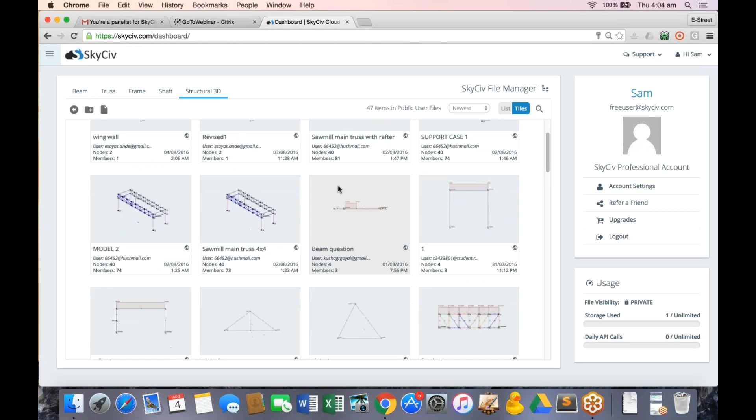So here we have a list of our software. You can toggle that in now. And here we have a list of all the files that we have through our file manager. We have a public user file, so you can actually see what other people are building. It's just an ongoing list of what users are creating. So you can see some really cool structures in there. Otherwise, we also have some structural samples just to get you started, looking at what's possible on the SkyCiv software.

And this is obviously all cloud-based, so all your files are managed here on our servers. You can send them to other SkyCiv users. It's a fully functional file manager, so you create folders, subfolders, copy, paste, rename, you name it. You can have a fully manageable file manager here.

At the top we've also got some support. We've got FAQ, documentation, contact us, and we really pride ourselves on our service. So we generally get back to you within a few hours and really try to help you with your modeling and analysis needs. So we're not just a software, we really want to give you the best service we possibly can. So we really are hands-on. You'll be speaking to an engineer or a developer, someone who's actually created the product, and they can give you really good customer service. We also have our account settings, upgrade page, and obviously log out.

So without any further ado, I'll take you through an example of the Beam software and also Structural 3D. So starting with the Beam, I'll just click this side tab, and this will take me to the Beam software. And we get a lot of feedback that it's a really easy user interface. So it's very intuitive. It won't take you too long to learn how to use the product. We find with SkyCiv Beam, training is watching a 10-minute video or a demonstration like this, and you're pretty much fully trained up in how to use the software.

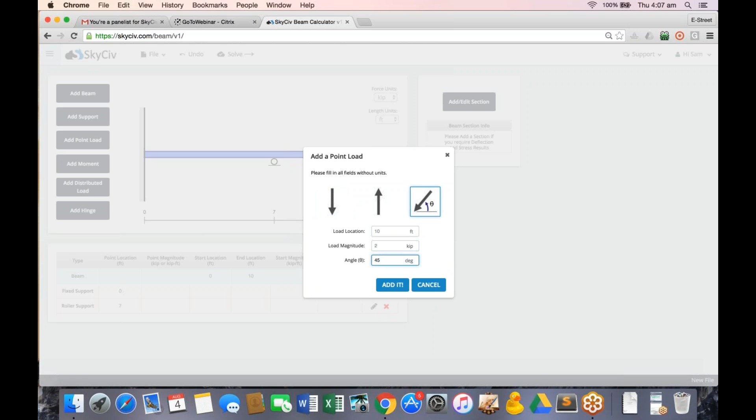So you just enter your position, the magnitude, and the angle at which you want to assign that load at. And distributed load, so I'll do maybe 2 to 8 feet and 2 to 5 kip feet in the downward. So I can go upward force or downward force. I'll just leave it as a downward force for now.

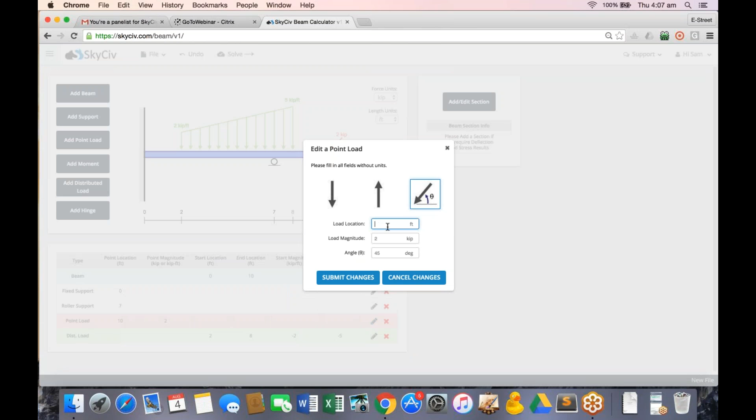We've also made it really easy to make changes, so maybe we want to change that location. I can just go down here to my table where I have all my inputs, and I can just change that point load, and maybe I'll move it across a little bit to 9 feet. So it just enables you to make changes really quickly, and especially when you're iterating between the results and the model setup, you can just hit that edit button there, and it makes it really easy for you.

You also see that the loads are all proportioned to the largest load, so we've got 5 kip feet, down to 2 kip feet, down to 2 kip, and it's all proportional, so you can really see where the main loads are occurring.

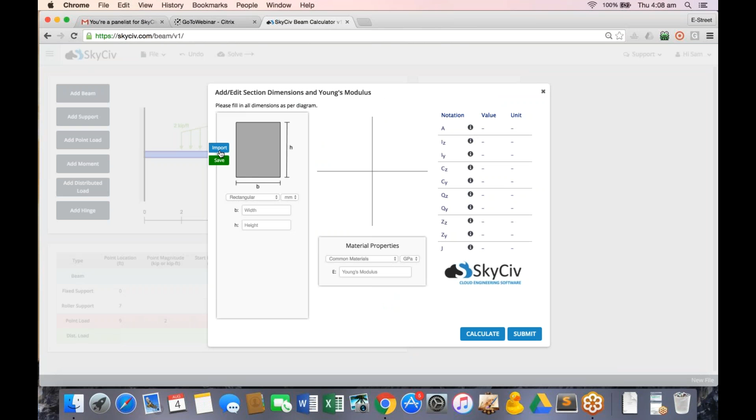The last thing to do is just assign a section property to that beam. So I'll just click this Add Edit Section, and here we have our section builder. This is constant throughout all of our software, so once you've learned it once, you know how to use it for SkyCiv Beam, for Structural 3D, and all the software that you have available to you. We do have a library of sections, so being in the American, we'll go through the American library. We have American, Australian, British, European, and you can also save and load your own sections. I'll show you how that can be done in just a minute.

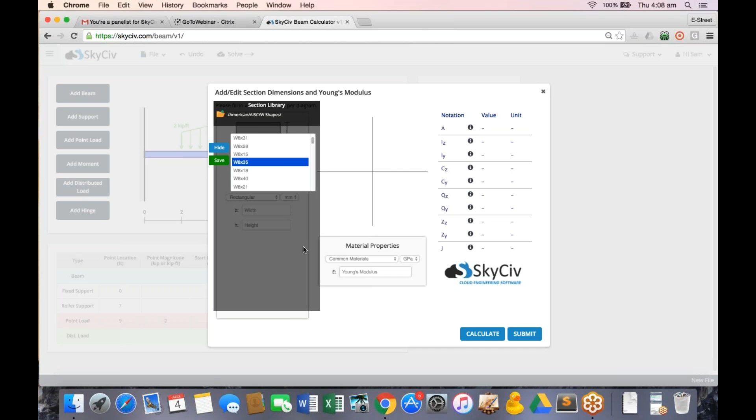So I'll just start by loading an American AISC W shape, which is sort of your traditional I-beam. When I double click that, I can see it's loaded. I can see my section properties here and also my material properties here. And I'll calculate and submit. And I can see it's updated there. So now I have my beam section information and that's ready to go.

So as you can see, I was talking and explaining, but I managed to build that structure within 30 seconds or a minute. So it really allows you to get started really quickly. You can run quick analysis, quick design checks, or preliminary designs, just in a matter of seconds, really.

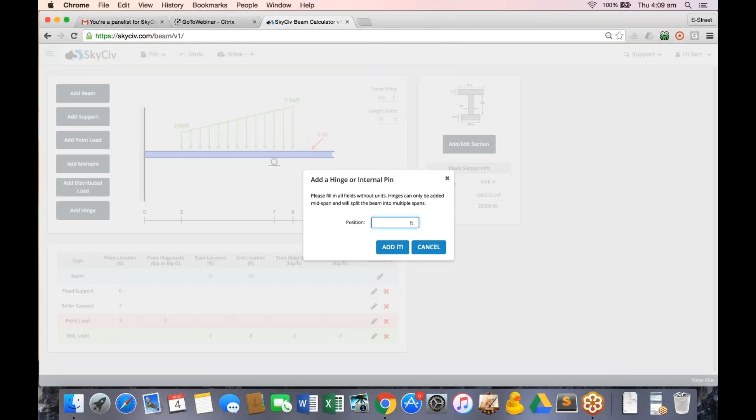And I might just add a hinge just to show. I'll add that on 3. So you can do hinge joints here, just more functionality for your designs. So once that's done, I'm happy with how my model's looking, and I'll just hit solve. And here we get taken to a very simple, very clean, concise report of the results that we have.

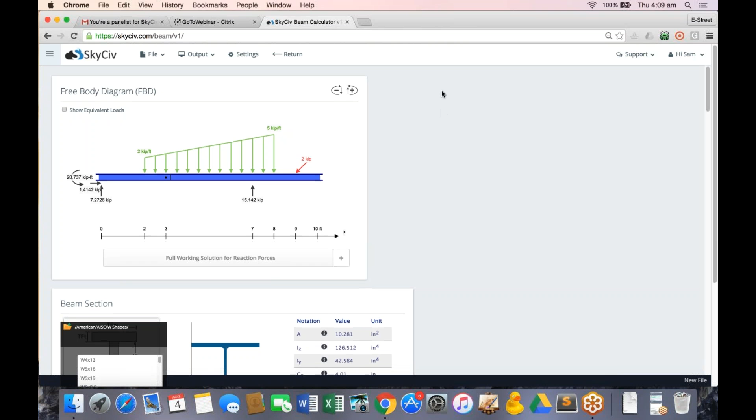So here we have our free body diagram. A great feature is you can turn on equivalent loads, so you can see where those equivalent loads are acting. Turn that on and off. I also have my reactions here. So I have my bending moment of 20.7 kip feet, my X and Y components of that fixed support, and also the roller support that I had here at this location.

Another thing we found we didn't like with traditional software is a lot of times this could get cluttered up and you can't really see some of the results. You'll notice that all of our labels, you can actually drag and drop them so you can really see what's going on there. So you never get that clutter where you can't really tell what's going on.

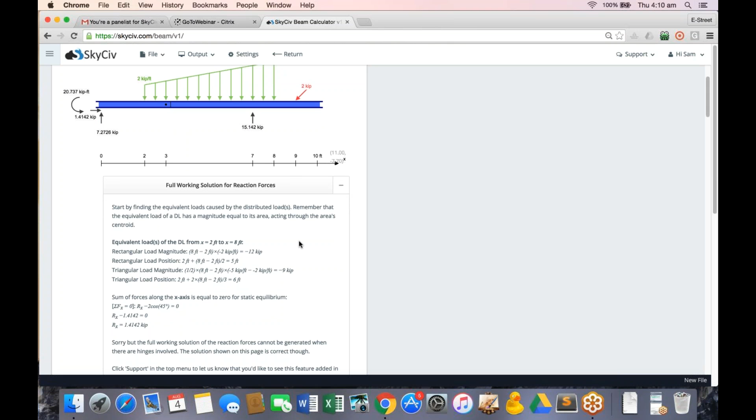We do have the full working solution of the reaction forces. So here it'll tell us exactly how we calculated those reactions. A lot of engineers need to actually hand calculate or verify their logic. This allows them to check their answers, check that their logic's correct and that their hand calculations are exactly right as well. And it's good for students as well for learning. It shows how we got to the solutions, and it works for determinate beams. So I'll just close that.

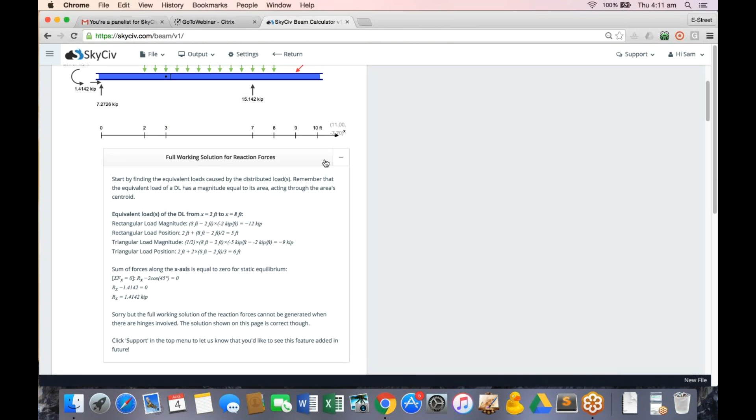Here we have our beam section results. So we have the same thing as the section builder. We've got all our results here, so you have a summary or a record of what you've built as your cross section, and your dimensions here on the left.

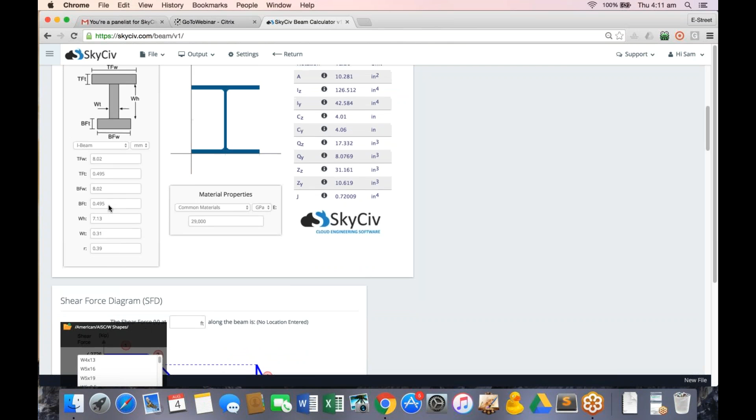Here we have our shear force diagram. So we have nice clean diagrams, and you can move these results, move these numbers, and if there's any overlapping, it's just a matter of moving them out.

You can also determine the shear force across any point. So say we need to know what it is at the midspan, I can put in 5 feet and it'll tell me the exact shear force at that location. So I can see it's minus 0.97 kip.

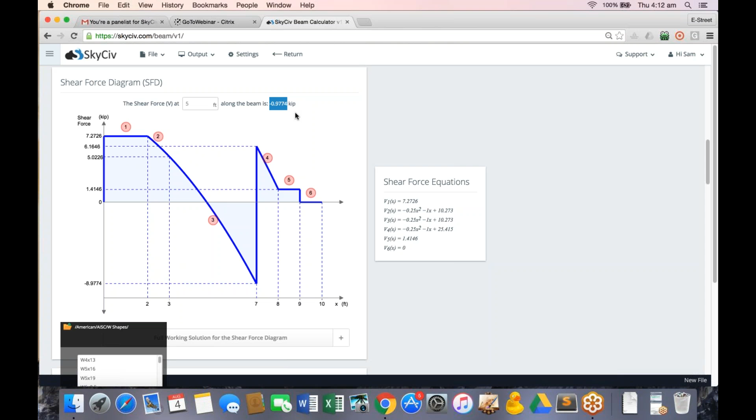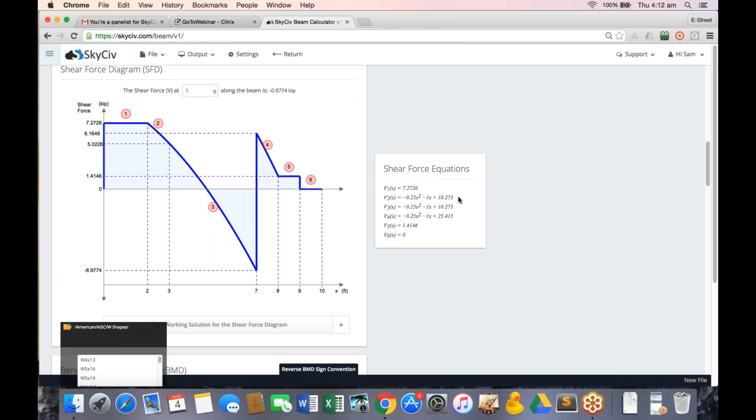We've also got the shear force equations here, so you can plug them into Excel or whatever other thing you need to calculate. We have all the shear force equations at any span across the member.

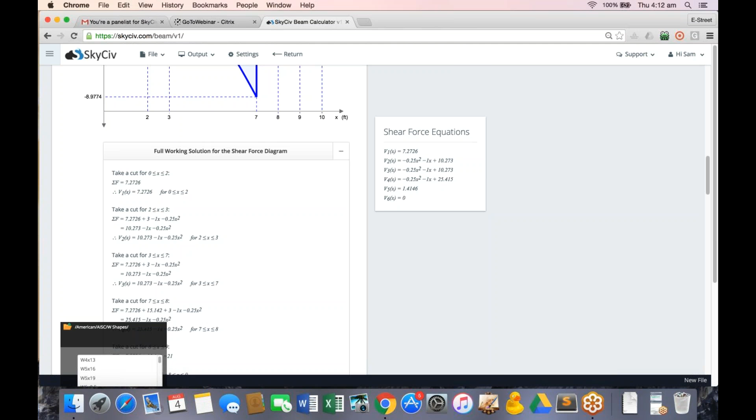We can turn on the full working solution here, so we can work out the cuts at each location. Whenever there's a change, like a load or a support, it will create a new equation, and this shows you how we came to those equations.

Same goes with the bending moment diagram. Obviously these take a lot of time to hand calculate, so in a matter of seconds you can get a nice clean diagram that you can include in your reporting.

Again, if I want to see what's going on at 2 feet, I can put it in and it'll tell me what's going on there.

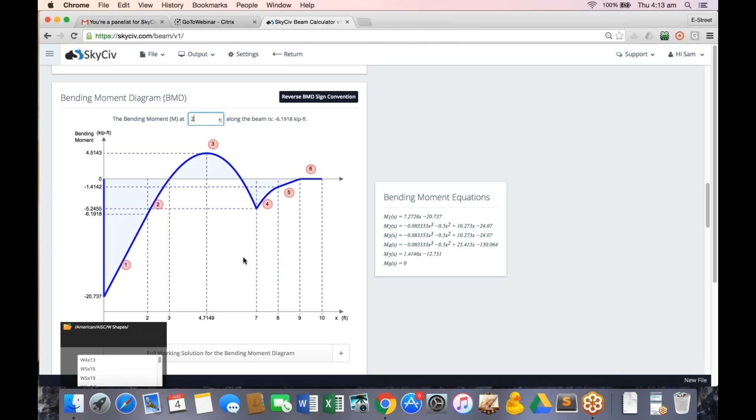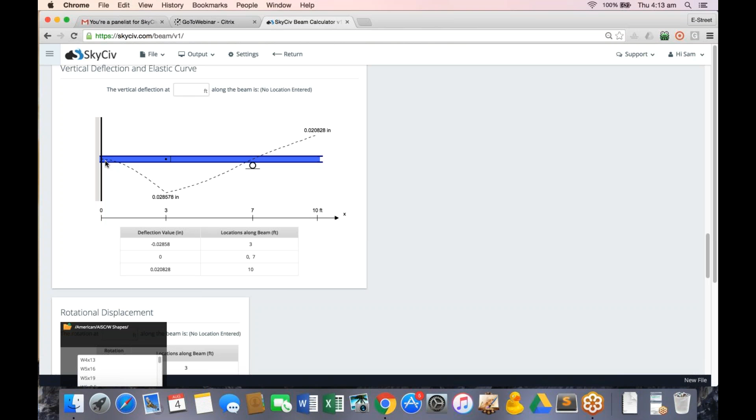Next would be the vertical deflection. So we can see there's a hinge joint, so there's a bit of a kink in the deflection curve, but it will tell us the max and mins of each span.

So I can see here we have a maximum of 0.02 inches, and we've also got it tabulated here, so you can easily identify where the maximum locations are and what the maximum deflection is.

Again, you might want to see what it is at the midspan, and we can see our results along the span of the beam.

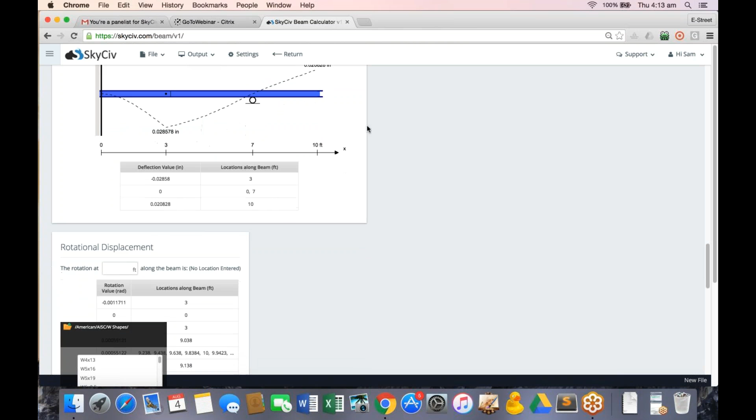Rotational displacement works in the same way, it's just in tabulated form, so we can see what the max and min rotations are.

And finally, we do have a really cool 3D renderer. This enables you to really see it in 3D life. You can make sure that your structure's been built correctly, that the dimensions you've entered all make sense. You might see it's too slender, but this enables you to really visualize how the structure looks in 3D space.

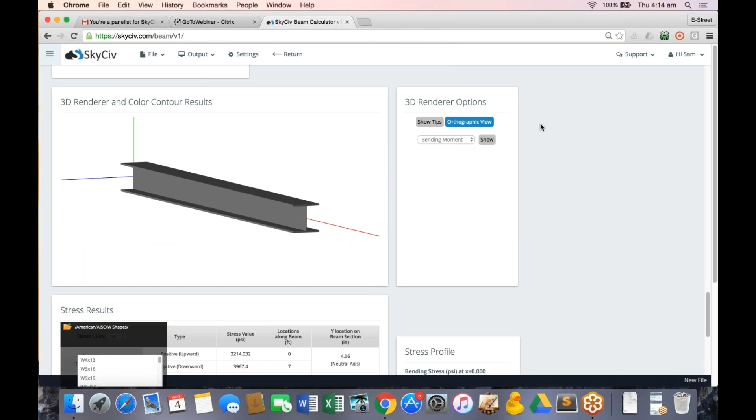A really great feature is you can actually turn on the specific results of what you're looking at. So say this is bending moment, I've also got shear force, I've got deflection. I can select from this menu all my results and it'll show it in real life on the 3D renderer.

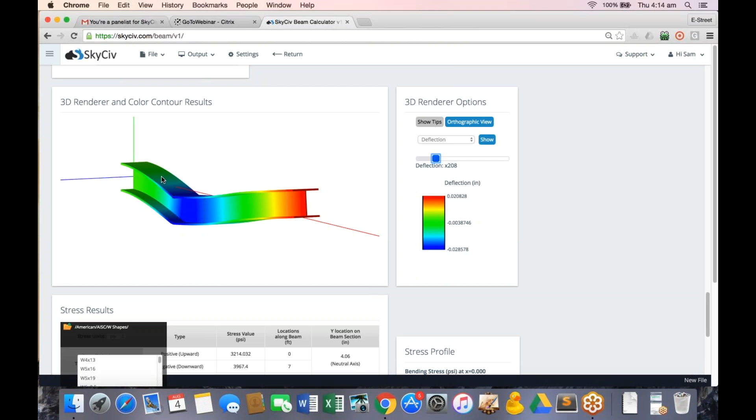So I'll put that as deflection, and I'll also show that you can actually deflect the structure. So I can see now my hinge joint has quite an excessive change there in deflection. I can really visualize and put that into perspective and include it in my reporting.

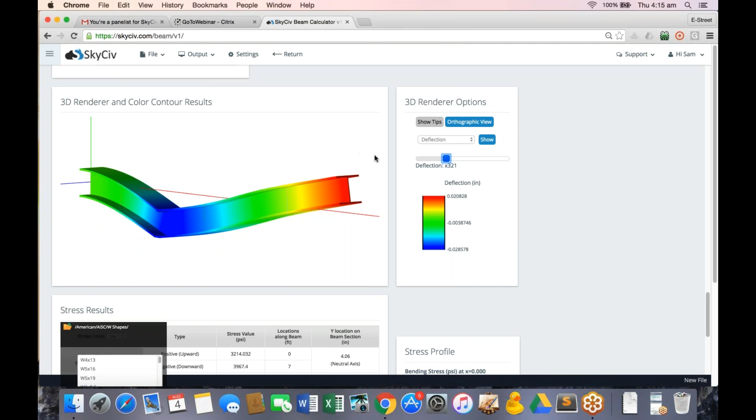So anyone who looks at it can now see we have a maximum deflection here in the blue of minus 0.028 inches, and that's where it's occurring, and I can see it's at the hinge joint. It really puts a more real-life perspective on the structure rather than just looking at a simple diagram. I'll leave it like that, so when I include it in my report, that's how it's going to show.

And finally, we have a stress result profile. This gives us our max and mins of our shear stress and bending stress. So I can see immediately where my maximum stresses are occurring, at 7 feet along, where there was a support. I can see that my max shear stress is there, almost 4,000 psi.

So for toggling between analysis and results, I can just scroll down to this stress result table, and immediately identify where my stress concentrations are, and where I need to really focus my design on.

I can even look at points along the beam, and it's going to tell me what the stresses are at that location. So I can use this in complement, and go down to bending stress, and have a look at these key areas I need to look at, and it'll show me a stress profile of what the stresses are doing across that cross-section.

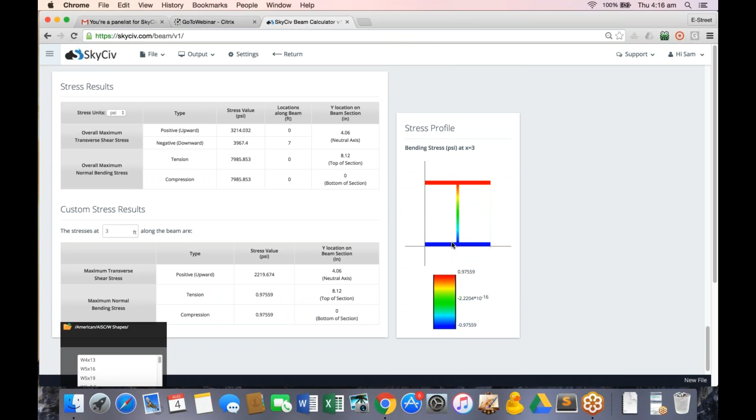And just to show you how quick, so that's the whole report there, and just to show you how quick you can iterate, and I'll just hit return, and maybe I'll change my cross-section. So I might make this top flange a little thicker, so I'll just put that up to, say, 0.8.

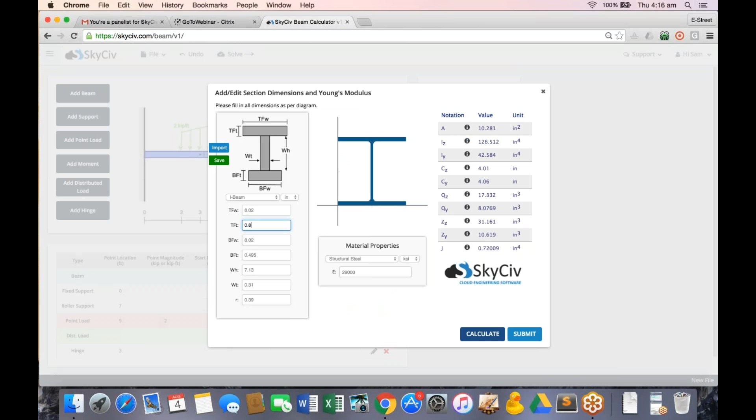Calculate, submit, so I can see it's gone thicker. Solve again, and my results are ready to go. I can scroll straight down to my stress profile and say, okay, that's gone down a little bit.

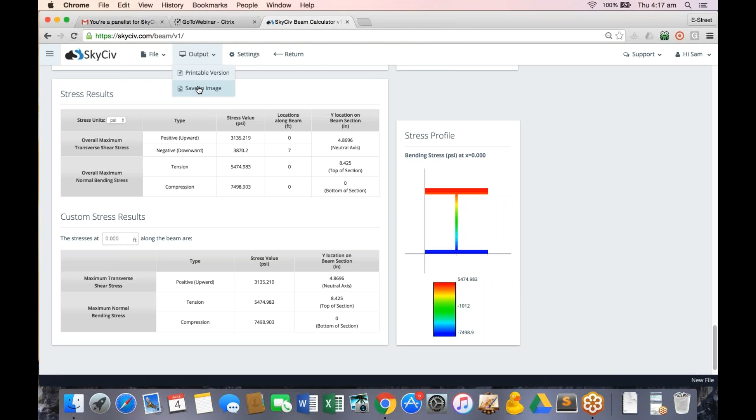I'm happy with that design. Let's export this report for the engineer or for the colleague or whoever it is that you'll be sending this report to. So from there I can save to image. We also have a save to PDF function that will be released in our latest update, but I'll just show you the save to image one. And this will just create a nice clean document for you to print or include in your reporting, and you can download that at any time.

So another thing you might want to do is just save and load your structure. I'll save this for later use. And that's now stored in my file on the cloud. So if I jump on another computer or if I want to show a colleague and I'm at their office, I can just simply jump onto Chrome, log in, and load my beam from just there. So it's nice and easy and it's all accessible.

So I think that's pretty much it for SkyCiv Beam. If there's any questions, I'm happy to address them now. But if not, I'll continue through to Structural 3D and we can answer all the questions at the end.

Can you save locally to your own computer? That's the question. Not at this stage because the SkyCiv Beam file isn't compatible with any other software. It's just a 1D structure. But for Structural 3D you can.

Okay, because the follow-up to this question is often in the field I don't have Wi-Fi access, so how do I address this problem? Yeah, sure. Okay, so you can use your hotspot. So I've used my mobile hotspot at times. You just turn that on and it'll give your computer Wi-Fi access. Yeah, that's usually how most people would use this remotely out in the field. Or it works on iPads, so if you have an iPad with internet connection, that's what a lot of people use as well. Okay, thank you, Sam.

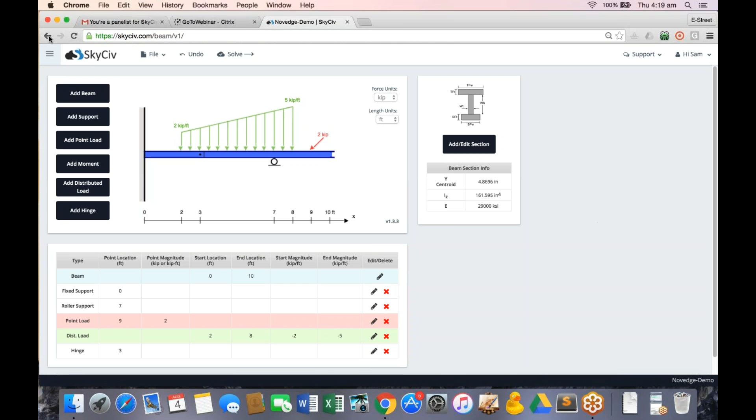Okay, so I'll just go through to my Structural 3D program. So we actually have a truss and frame program, but they're identical to Structural 3D, just with some limitations. So I'll just take you straight through to Structural 3D.

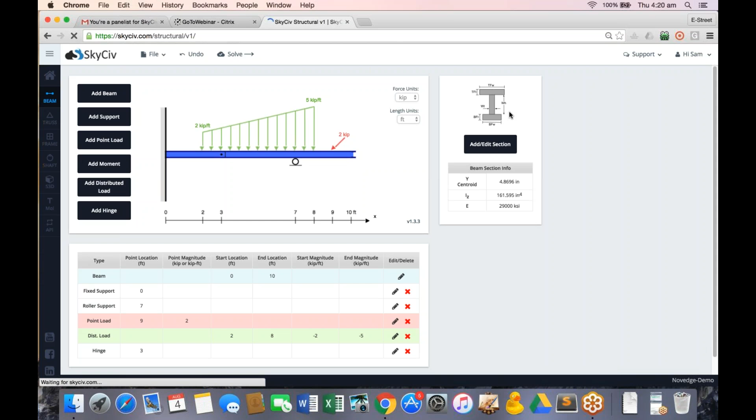Just make sure my internet connection is okay. Can you still hear me, Barbara? Yes, I can still hear you. We're just waiting for the connection. Okay, I was just worried my internet dropped out. There you go. Here we go.

So here's our interface of the Structural 3D program. So as I mentioned before, what we really like to promote is just it's simple, it's easy to use, it's clear, it's intuitive, so you can really get started immediately without any training whatsoever. So people will sign up for our accounts and jump straight in with virtually no training. If you do need training, it's just a matter of watching this 30-minute video or hour video. But it really is, the way we've designed it is to make it really intuitive and easy to use.

So on our left here we have our model building features, so adding nodes, members, etc. At the top we have our toolbar. So you can start a new file, you can open existing file, save load, and import and export. So with that question, we can export as a DXF file, so you can save that locally. You can send that to architects. It's interchangeable with other software, so you can really import and export your structures.

Under edit we have undo and redo. Job cleanup, I'll go through that a little bit later. Data sheet we'll also go through later. Output, and I'll just show you the settings just now. So here we have all our settings. I will change that to Imperial again, so it's just catering to you guys what you normally use. And we also have some visibility settings, some view settings, like you can turn on perspective or orthographic view, and some solver settings, so you can really be specific about how accurate you want your results to be.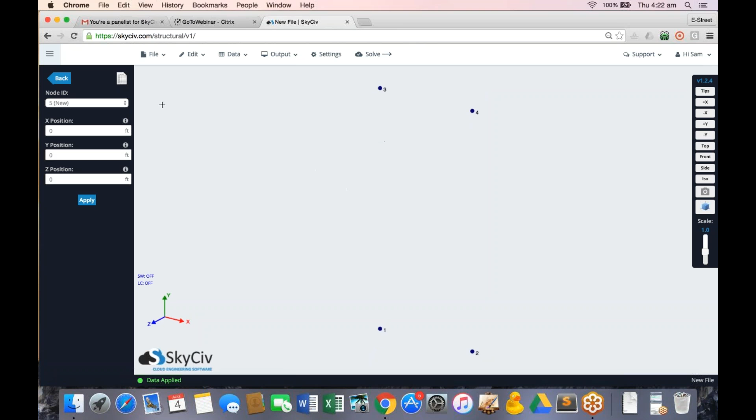Now another great feature is I can actually add in, through my data sheet, I can copy and paste these nodes, so I can do things much quicker. I'll just go ahead and copy that and paste it and add some Z component to it. And now when I apply that, it's just added that in.

It works much like an Excel spreadsheet, so if I enter a 4 there and I want to make a mass change, I can just drag and drop that and hit apply. So if you're working on a really big structure, this enables you to make mass changes in a matter of seconds. So that's all my nodes there.

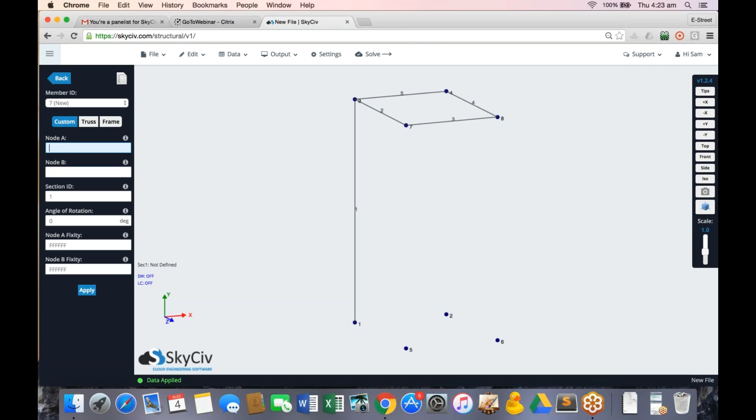Again, going with ease of use, we can now join these up as being members just by dragging and dropping. You can really mock up a design quickly just by dragging between your nodes. Alternatively, you can go through our side menu, hit members, and just join them up: 8 to 6, 7 to 5, and 4 to 2.

So it's just as quick. I can just toggle through and mock up our design.

Here on our members section, you can assign section IDs, which I'll show you now. Say for this top part, there might be a different section. I'll select the member I want to change, and change that to being 2. So I can really click and toggle on, assign different section properties really quickly just by clicking the member and changing the properties.

I can also angle it, or change the node fixity. So I might want to put a hinge joint at 8 there, or maybe at 3. If I go to 5, I'll change the fixity to a hinge joint there, and also change the section properties to 2, and hit apply.

And we put a little tab there, just a little line, to show you that that's not a fixed support, that there is a hinge joint there.

So I'll go back, and now I'll assign some section properties. We've added these members. There are 2 different types of sections. I can see here section 1 is not defined and section 2 is not defined. I can click here and it'll open that menu, or I can just hit the sections button, and I can start assigning my materials, my members, and my sections.

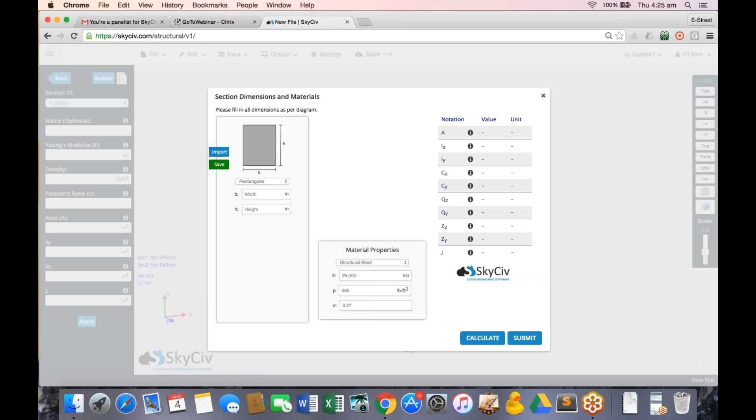So I'll just enter our section builder, and again I'll just import some sections from our section library.

Sam, I have a question. Sam, I'm sorry to interrupt. Sure. Barbara is asking, can you please open up the spreadsheet view for the members too?

Yeah, sure. Thank you. So there we have our mass changes as well. So if you want to say assign, maybe we want to change this to 3, we can just simply click that and drag. So there is a data section for all of our functions here. It's asking me if I'll discard any changes I made.

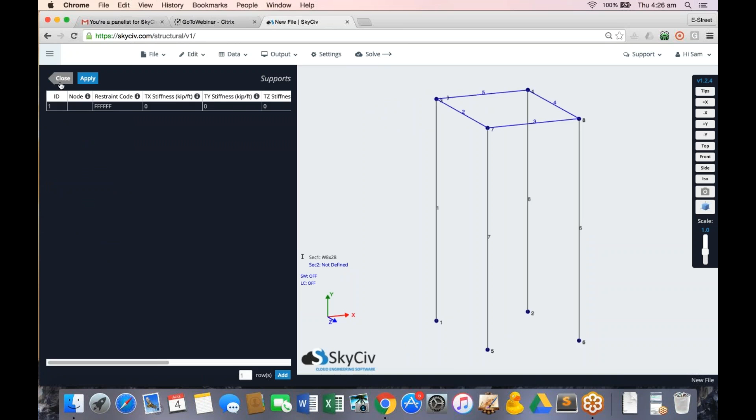So for supports, there's a data sheet. For everything, there's a data sheet. Point loads—so if that's what you prefer working with, they're all available there.

Okay, so I'll continue through. After I set my first section, I can see that's updated, so I can see a little I-beam, and I can immediately identify what that grey or that black section represents.

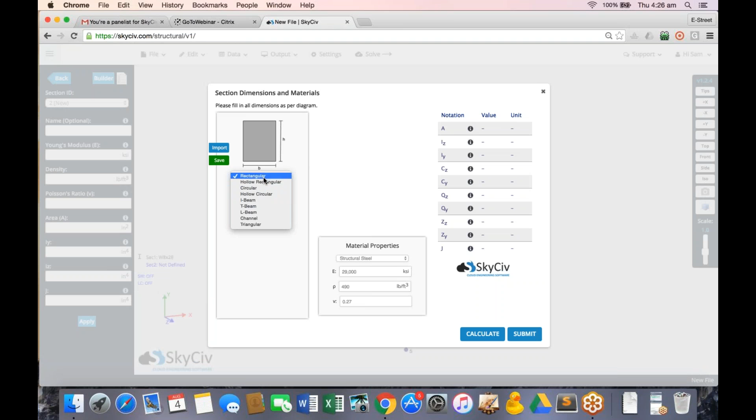I'll just add a second section for the top, and this one I'll actually just do manually, so I'll add a rectangular section. Maybe make it a bit bigger, so I can make my custom section and add that, and as you see, it's recognizing it there again.

So now my sections are assigned. I'll just add my supports here at the base.

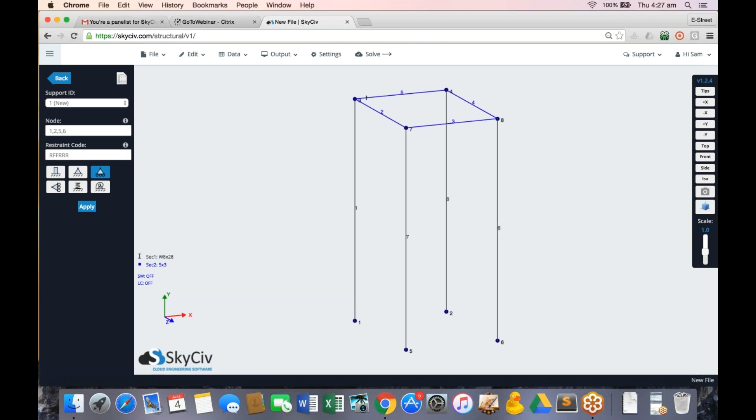A really great quick feature is you can just comma separate these, so I can go 1, 2, 5, and 6, and assign my restraint code as being fixed. I can select any of these options or put in a custom code, but for my purposes I'll leave them as fixed and hit apply. So in a matter of seconds I've assigned my boundary conditions to my structure, and I can see my base is being restrained with fixed supports.

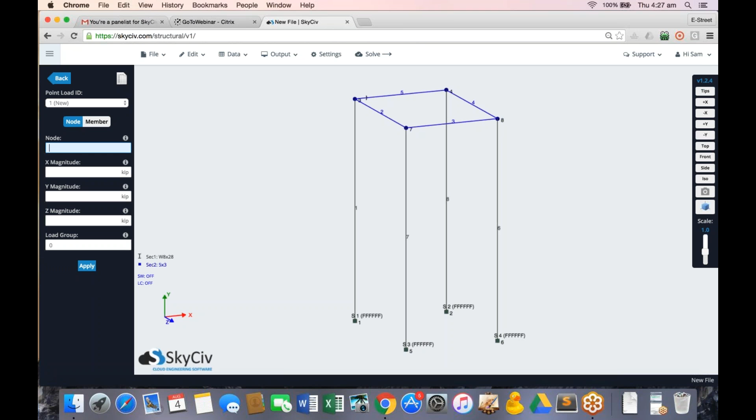So now we just have to apply some loads. I'll start by applying a point load. Point loads can be made at nodes, midspan, or any point along a member. So I'll add one at node 4. I can see node 4 there on my diagram.

I'll just do something like that, something in the X and something in the Y, and there I can see it's showing my force there in the X and Y component.

I'll also assign a distributed load, maybe across this member 3. So I'll assign member 3, and it's asking me for my start and end magnitudes. I'll do a distributed load, 2 to -5, and I'll offset this from the start and end position, so 20% from the start of this node and 20% from the end of this node.

I can also assign load groups, so if I want to do load combinations, maybe this is a live load and this one's a dead load. I'll assign load group 1 there, so it's a different load group. I'm assigning this UDL, this distributed load, as having a different load group to the first type.

So I hit apply, and I think I've made a mistake in what I was entering. Yeah, sorry, so -2 in the Y and -5 ending in the Y.

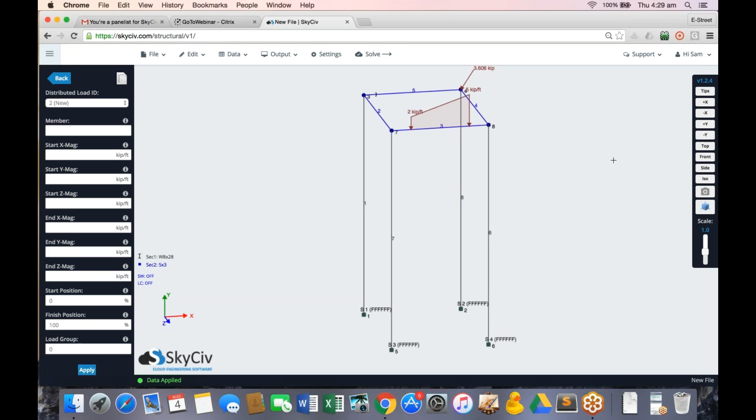So now I can see again everything is proportionate, so I can see 2 to 5, confirming I've entered that correctly. I can even scale these loads by holding S and scrolling, which lets me easily scale them just to make them more visible or make more sense of it.

And that's pretty much it. I'll assign a self-weight to the structure just to show you how easily that can be done, so gravity in the Y. And I'll show you a bit about the load combinations.

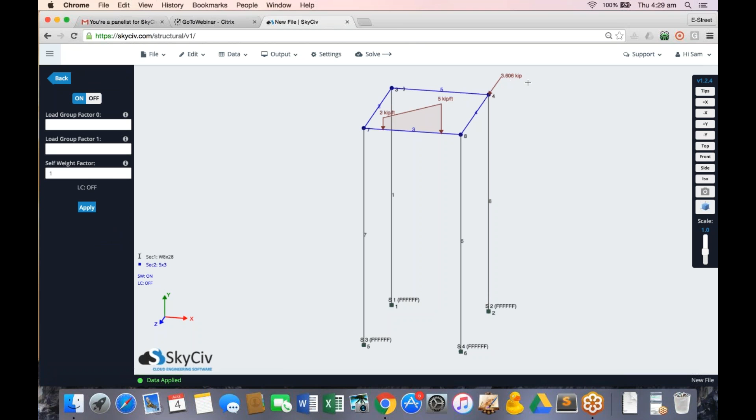So if I want to turn on the load combinations, I can see group 0 is this one, so maybe I want to apply a factor of 1.2, and for this one here maybe a factor of 1.5 to this distributed load. I can apply that, and I can see it's updated in my console there. My self-weight is now turned on, and my load combination is the equation that I'll be using.

I'll just show you how quickly it is to edit. My structure is completely built, I'm happy with my model, and I'll be ready to solve, but I just might want to make a few changes. As I mentioned before, you can click anything, so I can click my loads and change those there.

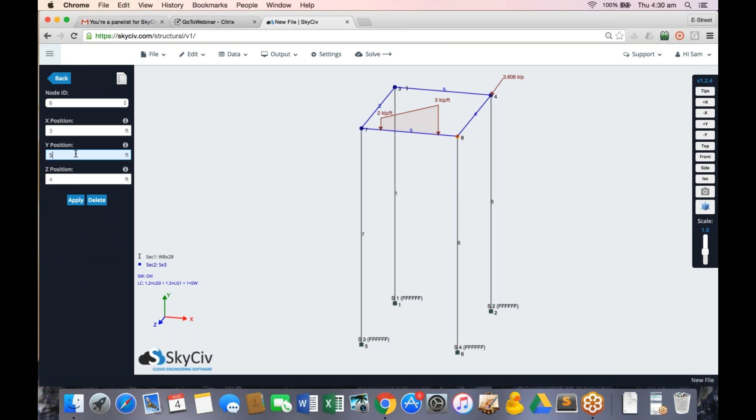Maybe I want to drop this load node a little bit, the Y component, so I'll drop that to 5, and you can see that's immediate. Those changes are made immediately, and now I have the adjusted structure that I wanted, just by clicking and making the changes through our left menu here.

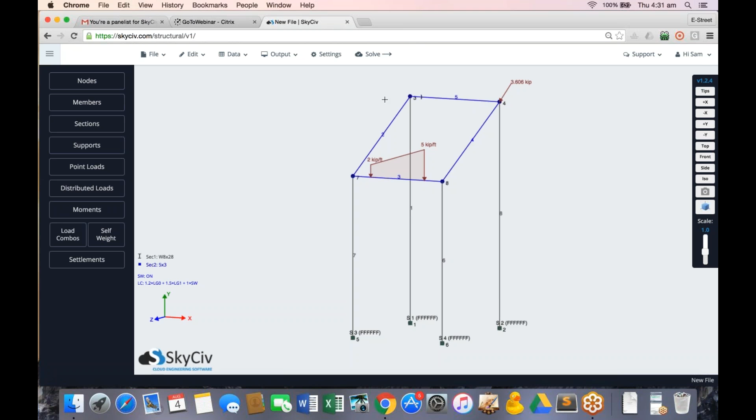But that structure is completely ready, and I'm happy with how I've built that. Again, I was talking my way through it, but something like this would typically take me 2 minutes to generate. So really, really good if you want to do a rough calculation or a preliminary design, or you just want to build things quickly and analyze them really, really quickly. We designed this software in that way, so you can build it really quickly.

But without any further ado, I'll go ahead and solve the structure. We have 3 analyses available: linear static, linear static and buckling, and P-delta. I will do a linear static and buckling analysis.

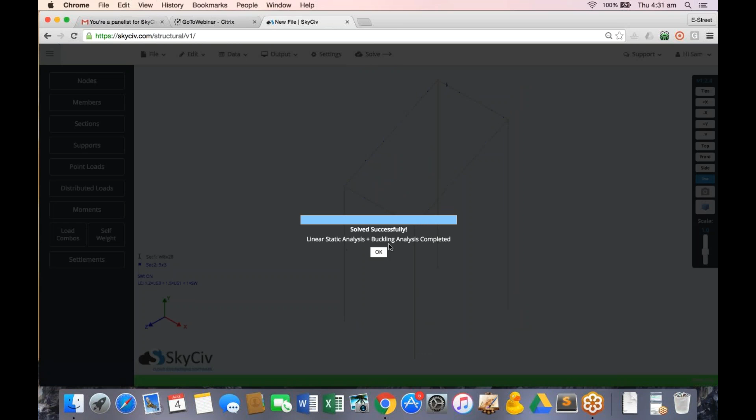And so this will get sent off to our server. Our server will do all the computation, so it doesn't put any strain on your computer at all. And you can see our structure is ready to view the results. So the buttons here on the left obviously have changed to account for the results that we have, and the structure is grayed out just to make everything a little bit clearer.

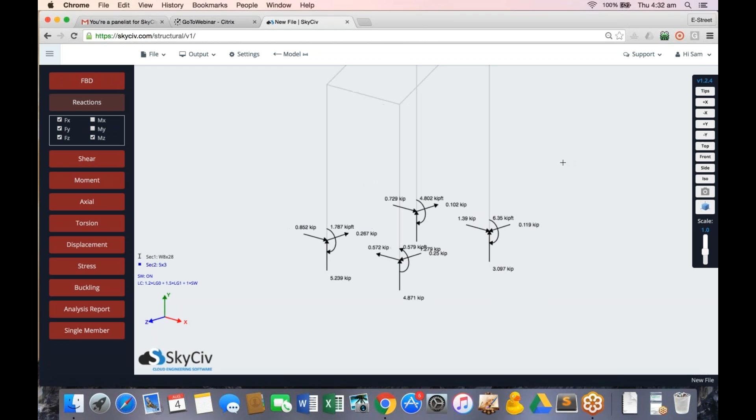So I'll start with reactions. So here we have our reactions. Obviously all our supports are at the base, and you can toggle on the different results that you want to look at. Maybe I just want to focus on the moments, because what we found with a lot of other software is this would be very cluttered and you wouldn't be able to really see your results. This diagram's not too bad, but in more complicated structures it can be.

So being able to toggle on different results just enables you to really zone in and look at the specific results that you're interested in. So that's reactions. Shear force diagrams. So we can see it's a clear way to view the shear force diagrams. We can scale these, so we can scale up or down based on what we want to look at. And again, we didn't like traditional software because it had this cluttering of results here.

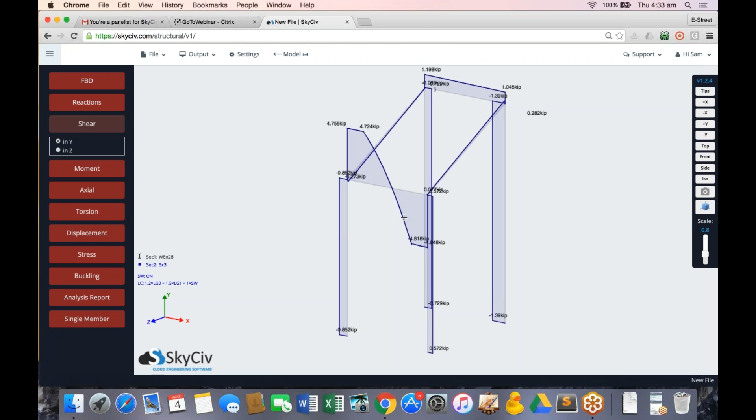So what we've done is we've added a few extra features, one of which being you can actually select a single member and you can really isolate that member, so you're not confused with the diagrams of all the other areas. This just allows you to select that one member and view those results. Another feature we've added, so I can turn that on and off, is again being able to click and drag these results, so I can move these around and really see what's going on in case there's any clutter of information. And what I might do here is I'll just actually save my structure.

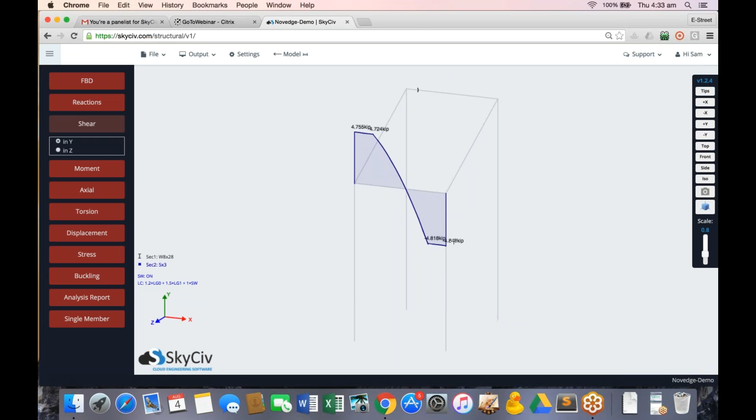And the reason I'm doing this is I'm going to make screenshots along the way, and they'll get saved with my file. So say this member is a really crucial part of the design. What I might do is basically, oops, sorry, let's put that. And that's a part of my design that I want to include in my report. I'll actually screenshot that and say shear force diagram member.

So I'll screenshot it, it'll save it locally on my computer, but it'll also store it with my file on the cloud. So now I'll have a screenshot available in my camera roll, and I'll be able to include that in my reporting. So it's actually asking me, do you want to open your camera roll here? So here I can see my camera roll of all my screenshots that I've taken throughout the demonstration, plus the thumbnail of my structure, just how it looks. And at any point, I can download these, I can delete them, however I please. So I'll just close that for now and continue with the demonstration, but you'll see how that comes in handy a little bit later.

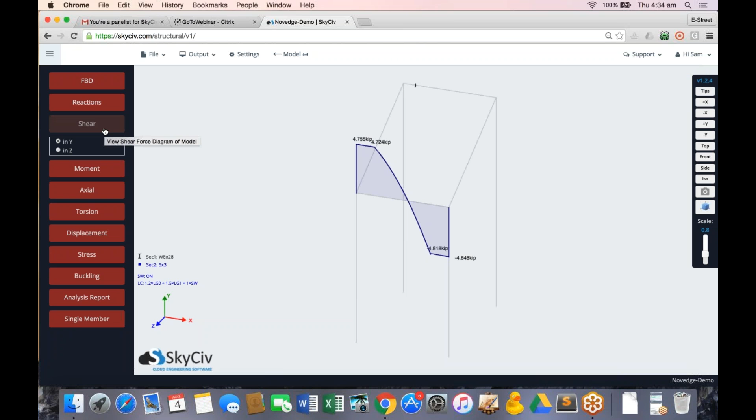I can also look at shear in the Z, or sort of toggle between Z and Y. So you'll see whenever you open up a result, you'll have these options available to what plane you want to focus on. Onto moments, so here we have our bending moments. Again, we can turn these on, or we can control and drag and turn on a few results, just if you want to look at those ones. But it works much in the same way that shear force did.

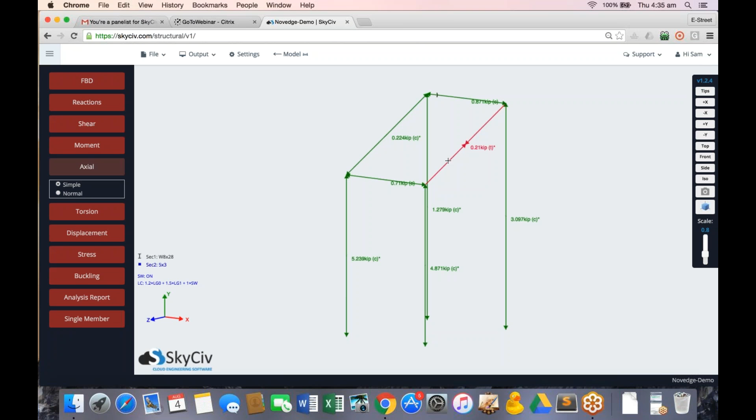Axial diagrams, we've actually done a little bit differently, just to make everything a little bit clearer. So I can see exactly what's going on, just at a glimpse. I can look at it, I can see what's going on. So I can see most of my members are actually in compression, and I just have one tensile member here at 0.21 kip. Again, we've done this just to make everything a bit clearer and easily identifiable.

I can turn on the normal diagrams if I want to look at the traditional way, or if there are some changes in the axial. Sometimes axial forces aren't exactly the same throughout a whole member. This will allow you to visualize that.

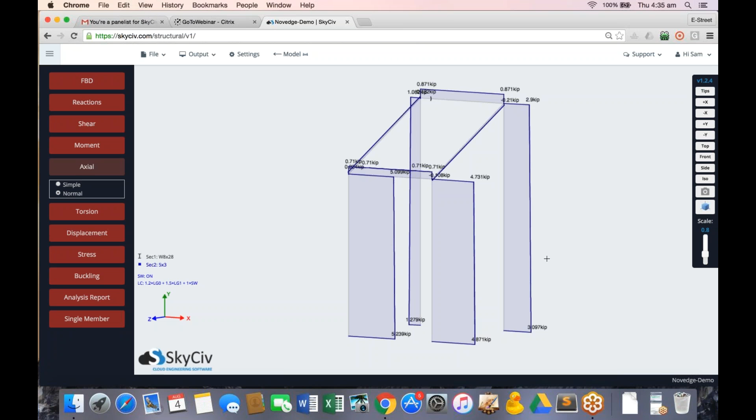Displacement of our structure. So here we have the deflected result, and you can scale in and out. So you can do this by using this, or by holding S and scrolling, and I can see how my structure is deflecting. Say I just want to focus on the sum, I can just turn that on through the side menu.

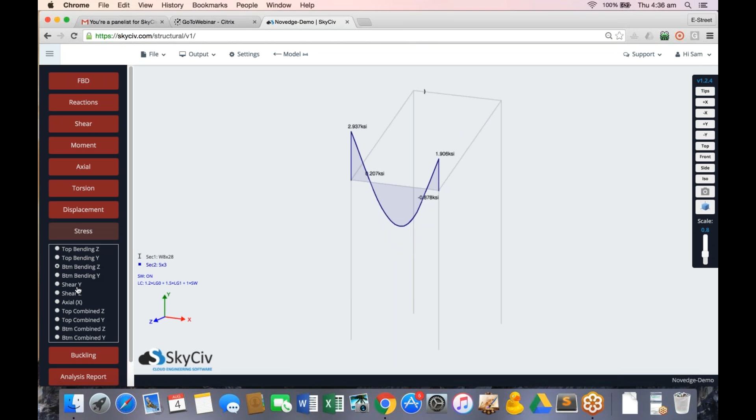That's pretty straightforward. And then we have all our stress profiles, so we can turn on the different stress results that we want to look at. Might scale that down a little bit and look at the different ones: we have top bending stress, bottom bending stress, shear, axial, and combined stresses as well, all available in that side menu.

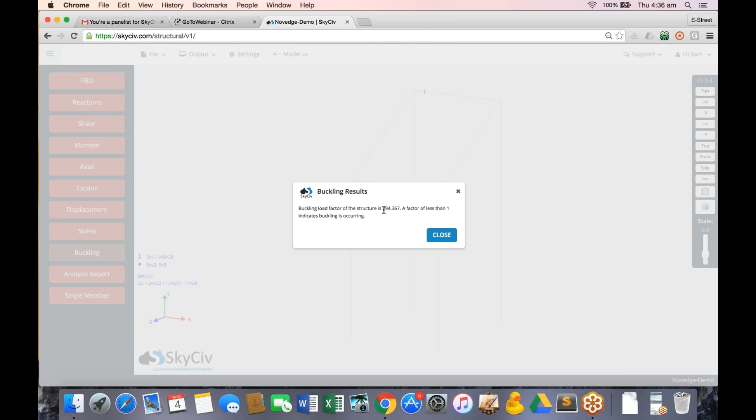The next result would be buckling analysis. So this is telling me here that the structure has a load factor of 294, which is greater than 1, so there's actually no buckling occurring in the structure. Say this member here was buckling, it would be denoted by a red line. So this line would end up red, and it would be in the buckling shape. So it might be kicking out like that. And it just allows you to easily identify what members are buckling or at risk of buckling, and allows you to adjust your design accordingly.

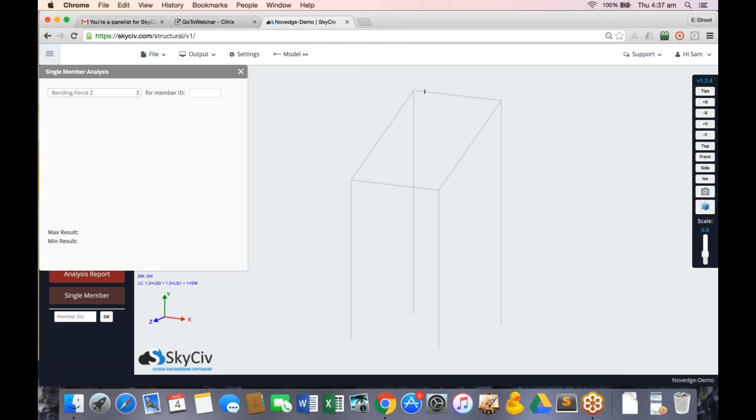I'll come back to analysis report. I want to add some more screenshots into that. But again, we have another great feature, which is our single member feature. So I can actually turn on the bending moment results, but say I want to focus on a single member, I can click that member to isolate it, or I can include it here and it will actually show the specific diagram, which I can then save or copy that image.

So if you want to include these sort of things in your reports, actually I think I got the number wrong, it's member 3. If I want to include that specific result in my diagrams, it just allows you to do it in a really clean fashion where people can easily identify what's going on in that member. I can actually toggle throughout to get the results in between, to get that maximum at 1.5. The bending moment there is 2.58.

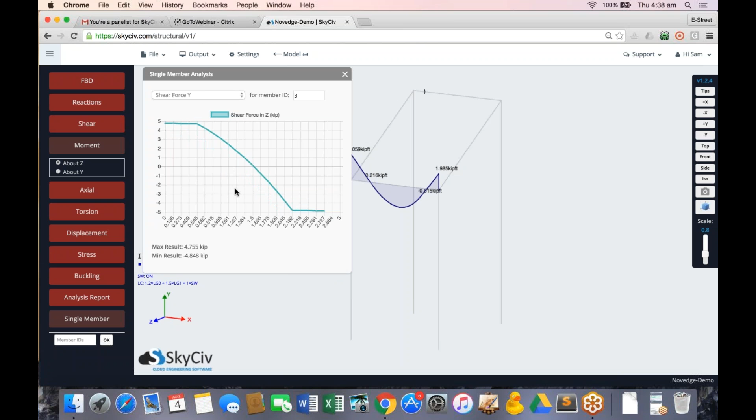But I've also got my max and min results here. And I can change the results. So maybe I want to look at the shear force in the Y. It'll update and make those changes. So you can go through a specific member and view the results for that particular member on a nice grid plane. So I'll go ahead and turn that off for now.

One thing I didn't mention is you can actually do that along any of these diagrams. So again, focusing on this one member, I can actually view the results throughout the member. So I can see 2.5 is where the maximum is for that particular member. So that's all my results. I'll show another way to display the information.

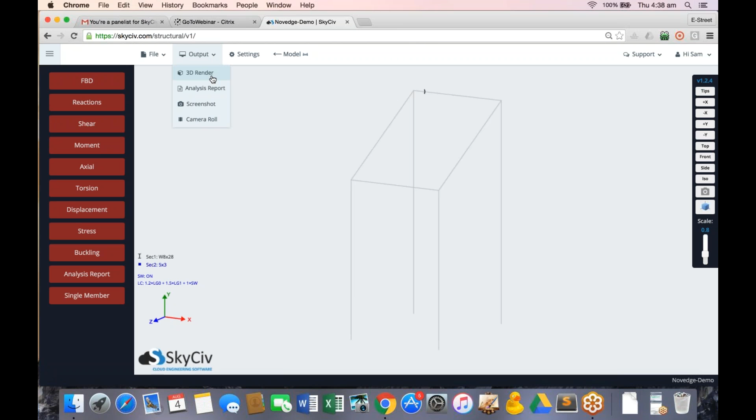So what we have is actually a 3D renderer. So it brings the structure to life, and enables you to view the structure in a real life application, and we can see that that's going to be a really strong structure. We've built some really large sections, and I can turn a base on and really bring it to life, so I can include this in my reporting.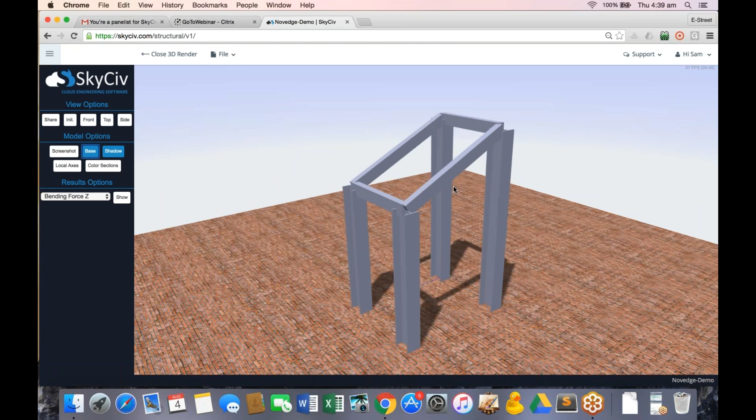And a really great feature is we actually have our results, so you can turn on your results for any of the results that you've seen in the previous page. Maybe I'll look at deflection or bending stress, and I can see exactly what's going on in my member there. I can easily identify where the main areas of the design are through this color contour, and I can deflect my structure to bring it to life.

And what I'll do is I will take a screenshot of that. So BMD render, and I'm going to include that in my report.

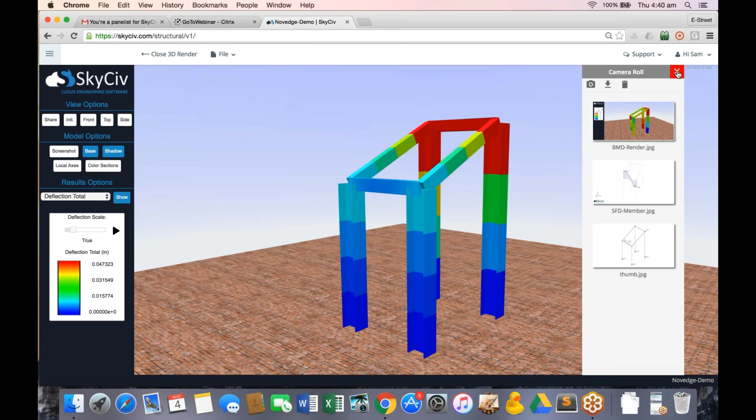And I can animate that just by clicking this play button, and it'll animate that. I'll turn that result off, but it just allows you to... It's just telling me that my screenshot's been confirmed. It just allows you to easily identify the main area.

So I can see that's where the main deflection is occurring, or maybe I want to look at the bending stress in the Z. I can see that there's some bending stress here, but most of it is occurring here in this top member, in that joint there. So I'm happy with that. I've looked at my design.

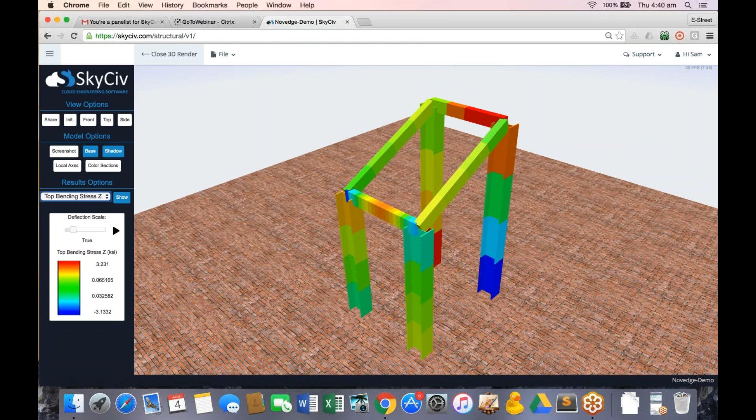I'll go back, and now I can demonstrate how we can export an analysis report, taking all the screenshots that we've done throughout the structure. So I'll just click analysis report, and it's going to ask me to select images for reporting. So I'll include the BMD render and the SFD member, so I can actually click which screenshots I'd like to include, and then I'll just hit Save PDF.

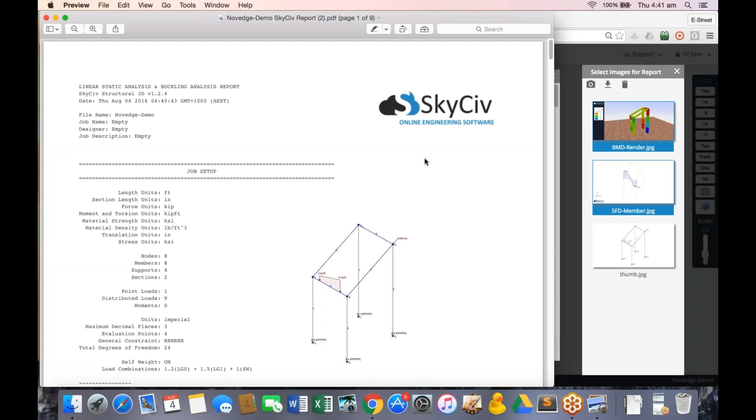So what this will do is generate a nice, clean PDF format for my analysis report. It's got the screenshot of my structure, so I can immediately identify what structure I'm looking at. It's got my file name. If I assigned any job names or designer, say I have this account for a number of people, I can actually assign a designer, so I know who actually built this model, and any job descriptions that go along with it.

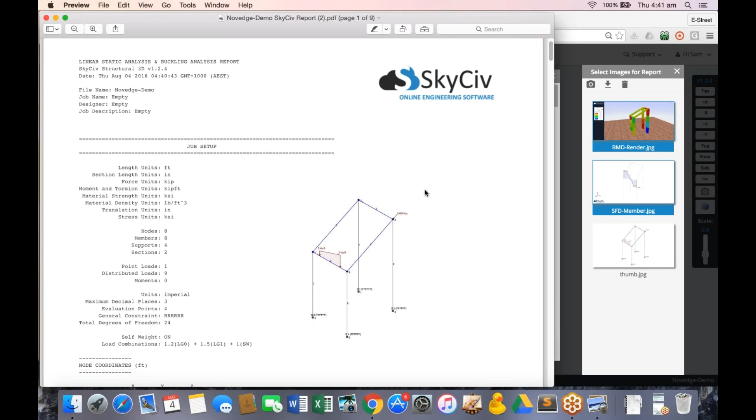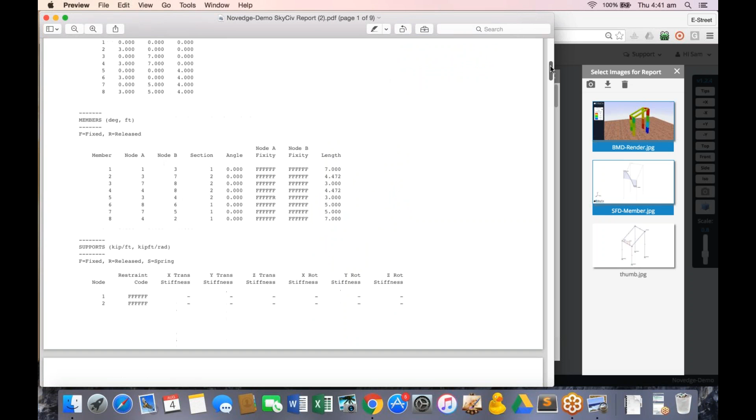So this is a job setup, so it'll tell you exactly how you've set up your structure, so you can pass this on to another engineer and they can make sure that all the input is correct. I'll scroll down. I have my supports, my loadings, my section properties, all the typical information that you need to know for an analysis report. But here we do have our user-defined screenshot, so you can actually pass on more information to the engineer.

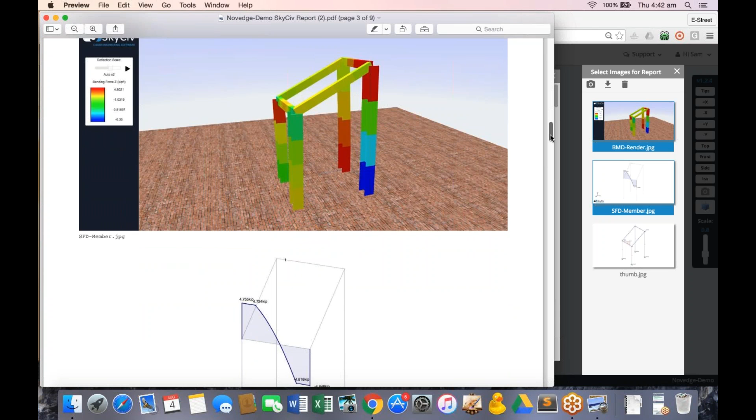So say this is a critical part of the design, that member, I can include a whole range of screenshots. So my manager or my colleague or my client can easily see what's happening and what I'm talking about. I don't have to sift through pages of numbers to view the results that I need to. I can actually look at these in my report in a nice, clean, concise manner.

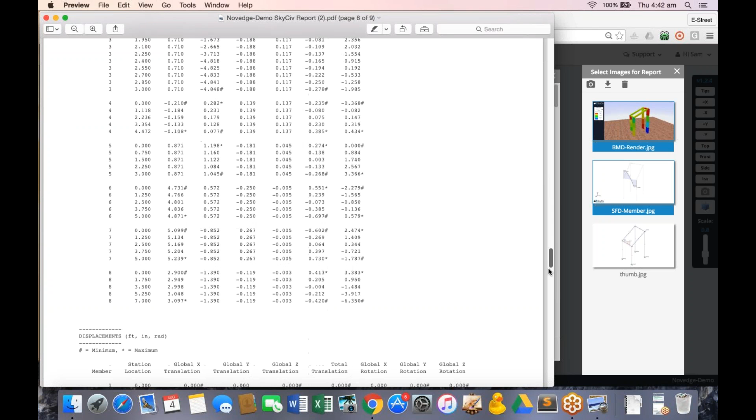And then we have all our node reactions. We have all our specific results that you might want to export and view in an Excel spreadsheet or view specifically for the points along a member. Yeah, so full analysis report available in PDF format. And that's pretty much it. I can save my structure again. So I'll just save that just to make sure that I have the most up-to-date version available.

And I think that's pretty much it. I hope I haven't forgotten anything, but if you have any questions, I'd be happy to address those, and I think that will open up any other features and functionality that we do have available.

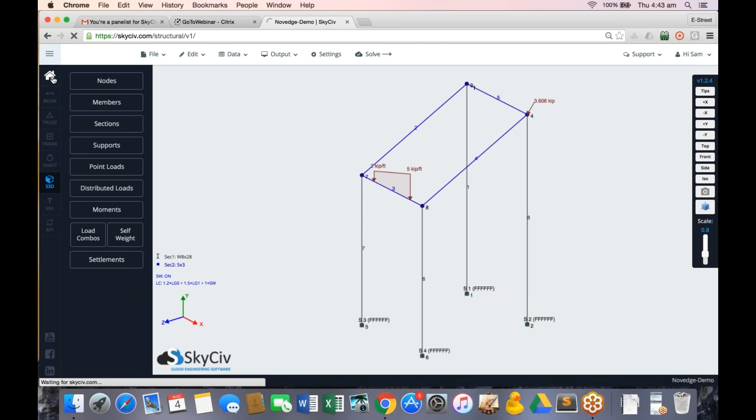So I'll just show you actually how that's come into my dashboard. So if I go back to home, I can now see that under my structural 3D, my Novedge demo is actually there. So I can now share that. If I had, for instance, Barbara at Novedge, I'm not sure what her username is though, so it's probably not going to go through, but I could just send that to her and she will get that into her inbox. So it allows you to exchange information with other SkyCiv users really, really easily.

So if you did roll this out for your office, we can set up shared folders where I save this and Barbara would be able to see this file as well. And then she could just simply double click it and open it up in her software and be able to make changes quickly from wherever she is. So it's really unleashing the power of the cloud software.

So if there's anything else, I'd like to use this time now to address any questions. No questions so far, but that was very cool, Sam. And yes, please, if you have questions, this is your chance. Yeah, we'll be waiting a few seconds. And also there's, yes. Sorry, go on. Yes, I just see a question. Does it also perform truss design?

It does. You can build trusses in it, but it's all analysis. So it's just a structural analysis, so there's no real design component to it. But yeah, trusses are just a matter of going into members, and you can assign, say, this member as being a truss member, changing those fixities manually, and then hitting apply. And I can see now that it has a hinge joint at both ends, just denoted by those little tabs there. So a lot of people do use this for truss analysis or bridge analysis, and then they use those results to proceed with the design.

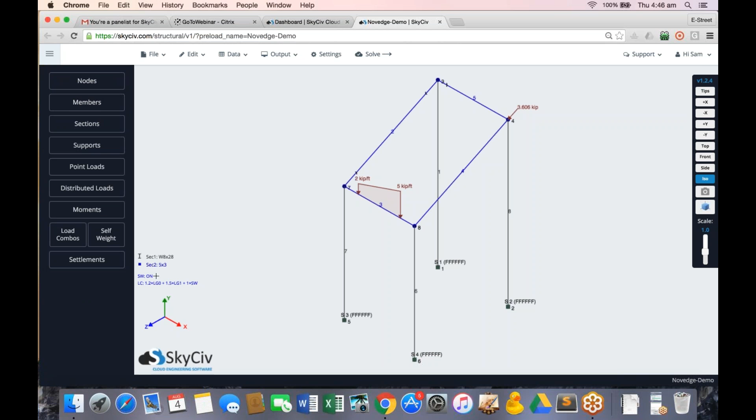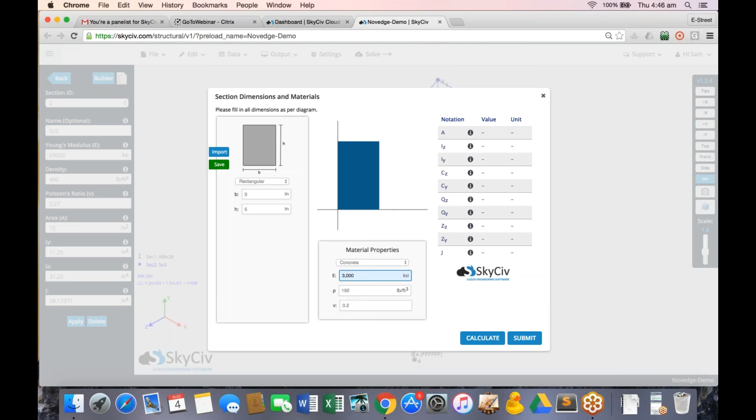And also, another question, Sam, can you analyze concrete too? You can change the member property, the section property materials. So for, say, section 2, we want to make that concrete. I'll just go into my builder, and I have a whole list of materials available here. So I can go concrete, and I can manually add, say it's a stronger concrete. My Young's modulus there of 3000 KSI, my density and my Poisson's ratio, I can make those changes to make a custom material, calculate and submit, and now those members are concrete members. So yeah, you can pretty much model any material that you like.

Okay, and what about plates? Plates is something on our future features list, so it will be rolled out in the coming months. With our software, we're always adding to it, and these updates happen really quickly. We update every 2 weeks, adding features constantly, and when they do occur, you don't have to worry about upgrading or updating, it'll just come immediately. So plates is definitely on our future work list and should be out in the next 3 months or so. This is awesome news.

Any more questions? Yes, how does the concrete beam design address steel reinforcing rods? Okay, so that's actually something we're working on right now. One of the features we'll be adding is composite sections. At the moment, you just assign a single member with a single material property, but we'll be adding steel or composite sections, so you can add in your steel reinforcement. We've started work on that already, so that one should be out sooner rather than later.

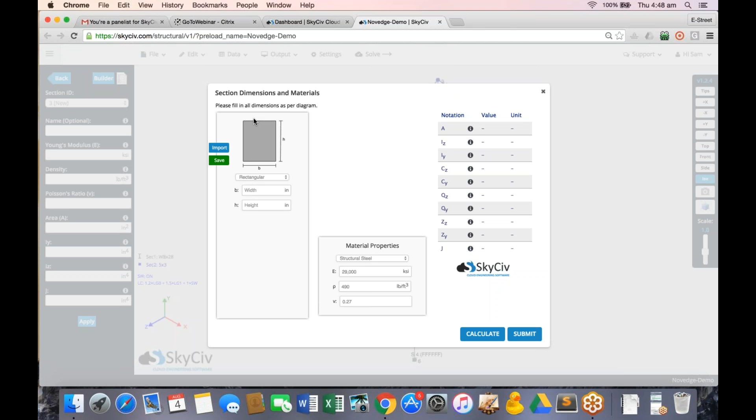And we're also completely beefing up our section builder to account for completely custom sections, composite sections, importing DXF files as your sections, and really unlocking a whole great list of new features in the section builder. So to answer your question, it doesn't do it at the moment, but it is coming out soon. Good news.